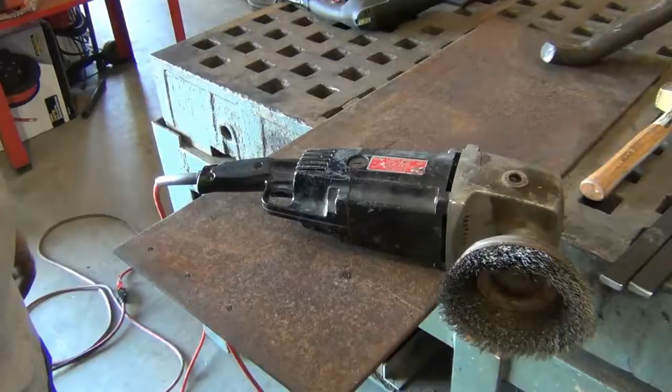Okay, I'm just going to clean the bottom of this plate. The plate is actually very rusty. We need to get that out of the way so that we can arc weld it. I have a MIG welder, a 125 amp unit, but it's just a little too light duty, even using a gas mixture, to weld anything this thick. So I'm going to go ahead and use the arc welding stick process here.

And I can't say it again too many times: buy quality tools. Sometimes if you know you're going to use a tool once or maybe twice, and then throw it away, that's fine. But if you're planning on keeping a tool for a long time, it pays to invest in it.

I bought this grinder when I was probably 17. This is a model 315 10580, a Sears 9-inch sander grinder. I'm now 60, so this has been around a long time, and it works just as good today as the day I bought it. The one thing I did have to do is replace the cord, because over the years it got pretty banged up, but the grinder itself still works just as good as the day I bought it. So do spend the money, buy good tools, and they'll last you your lifetime.

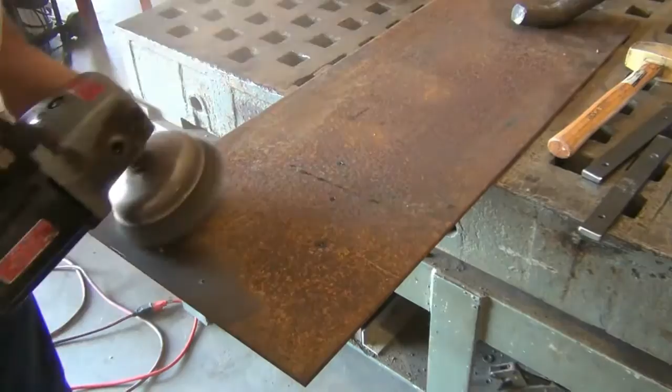Use a tool that's got the power to do the job. This is all the way down to nice clean bare steel, and there's absolutely nothing I need to do from here—that's ready to go. So I'll get the other pieces cleaned up on a stationary, bench-grinder-mounted wire wheel, and we'll get this bolted together, and I'll get the welder set.

Okay, I have the pieces all put in place and we're ready to weld, but there's such an array of welding rods and processes, and how do you know what to weld what with, because there's so many different things. This is a resource put out by the Lincoln Electric Company. It's widely available. This particular one is the 100th anniversary edition, published in 1995, but the process really doesn't change a lot. Sometimes there's a new rod or new material that comes out, but for just about everybody here doing generic work with like A36 plate, which is what this is, and just putting general stuff together, you're going to find everything you need to know in this book.

I think I paid $20 to $25 for it on eBay.

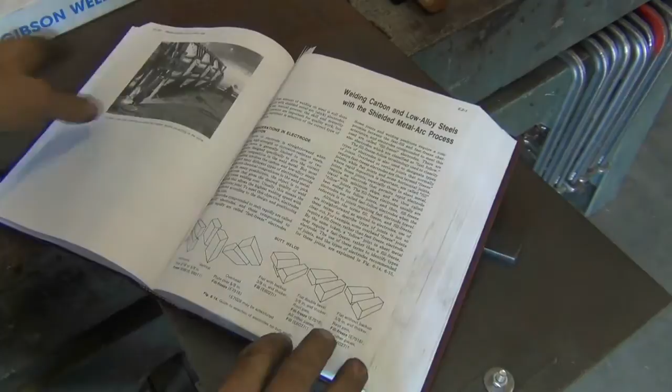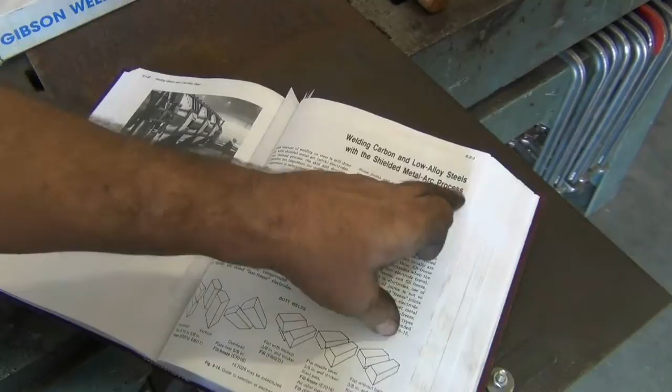So what do we do here? I'm going to come over here to section 6.2-1. This is welding carbon and low alloy steels with shielded metal arc process. Shielded metal arc, SMAW, shielded metal arc welding is stick welding with regular rods.

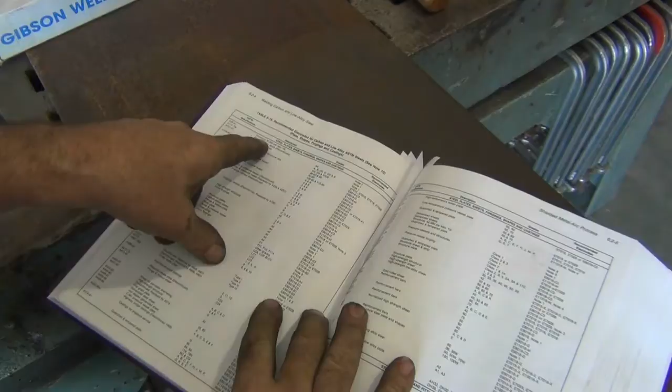So this is where we go to find that kind of information. Then I'm going to come back here to my last bookmark, this is 6.2-4. We're going to be welding A36 plate, so that's A36. That's my material right there. Structural steel, 36,000 psi minimum.

Pretty wide open here, it just says see note 1. So we'll flip the page over, and down here in note 1 it says, unless restricted by specifications, such as something that they would put on a drawing or whatever, use any E60XX or 70XX electrode for steel grades with 60,000 psi or less tensile strength. For steel grades with 60 to 70,000 psi tensile strength, use E70XX electrodes. So that means pretty much any 60 series electrode, and we will be fine.

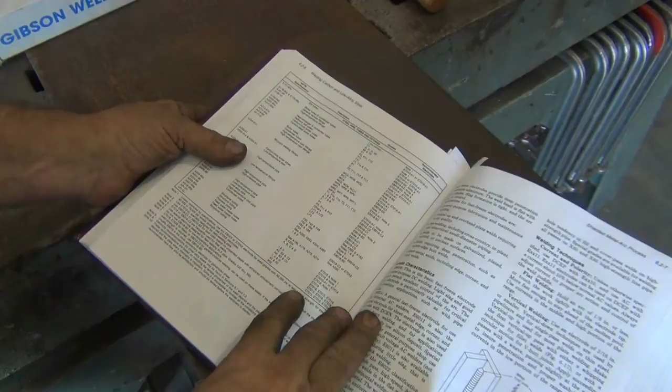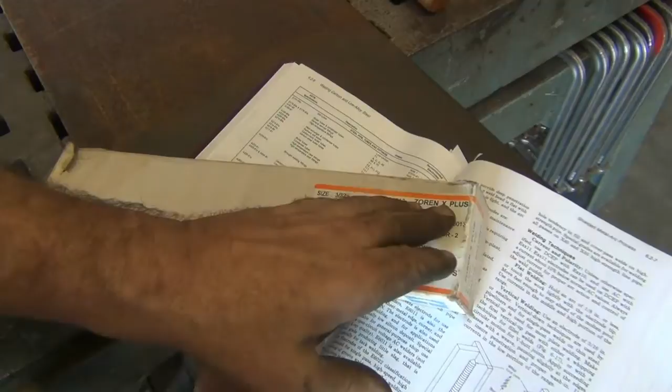So I've dug around on my shelf, and I came up with this. You don't need to know the name of who makes it, but it's made by Gibson Welding Products. It's E6013 rod, so this conforms to AWS SFA 5.1 E6013. This is the same as Lincoln E6013 or Miller E6013 or whatever you're going to get at Home Depot, E6013. 6013 is 6013. We're going to be using 3/32 rod.

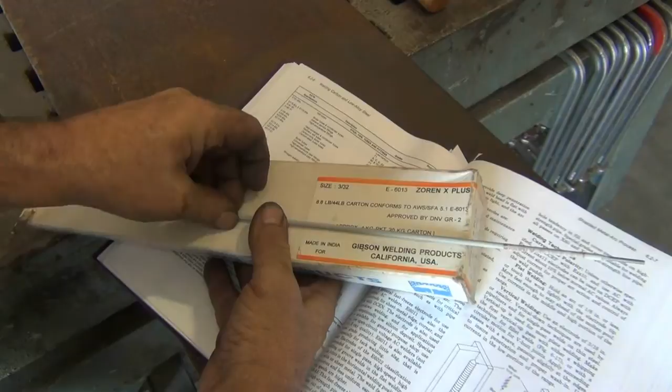That's pretty small because we don't need a lot of power, a lot of holding. I'm only welding 1/4 inch material, and I really want to try to keep warping down to a minimum, so we're going to use 3/32 E6013. So now we know we can use that.

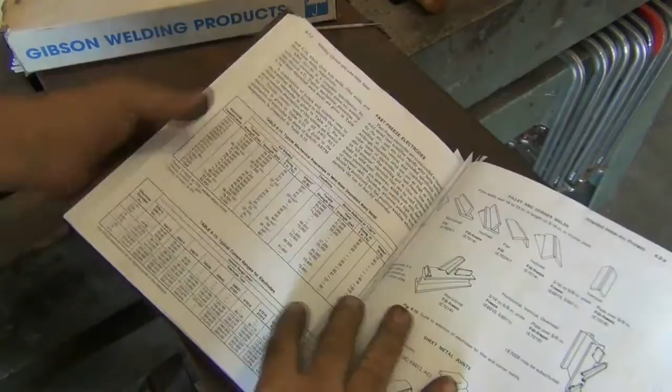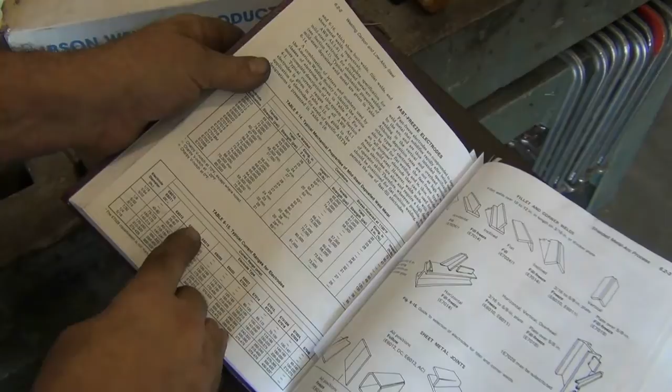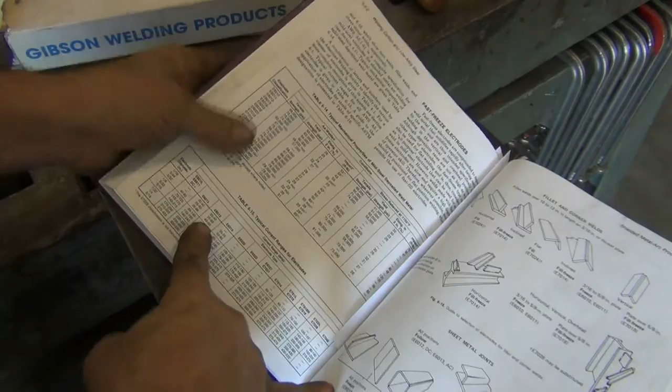I flip the book back over here, and I look at typical current ranges for electrodes. This is page 6.2-2. I go to 3/32, I go over here to E6013, and that means that we can use between 45 and 90 amps of power on our welder. And if we go over here to this other section here on 60, let's see if I can find it.

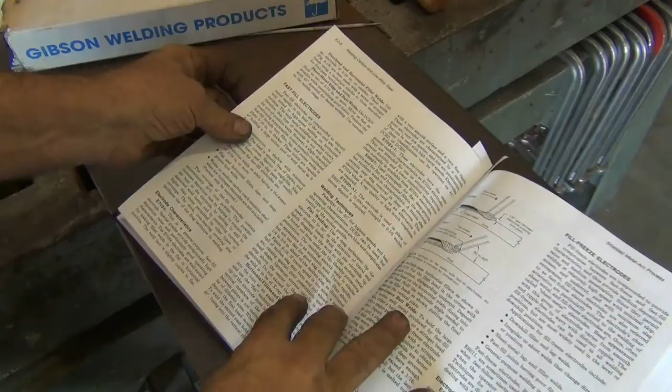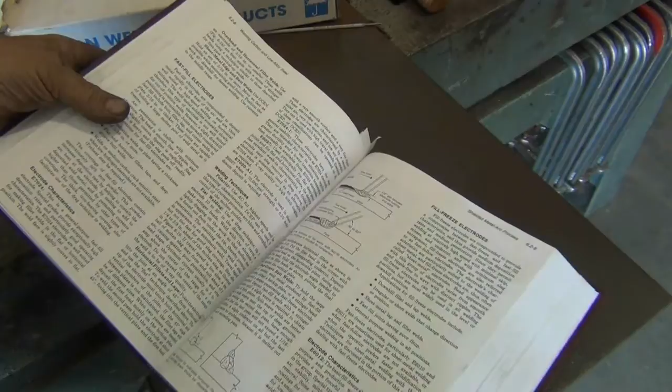Yeah, okay, 6.2-9 right here. Under fill freeze electrodes, we can look at E6011 and E6013 right here. This electrode is used in place of E6012 for sheet metal welding, so you can do really thin stuff with it, where appearance and ease of operation are more important than speed. AC operation is excellent, so we're going to use AC current, and we're going to use 45 to 90 amps. So that's how we know.

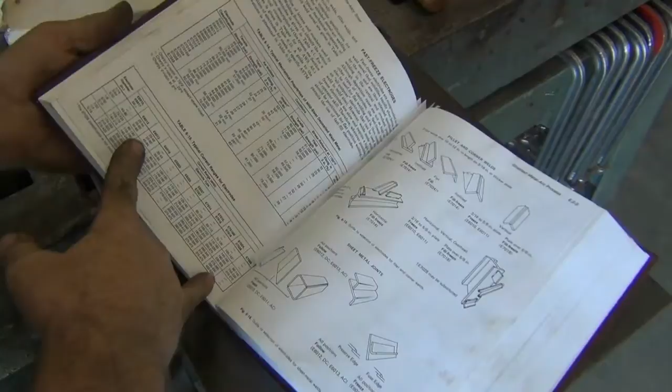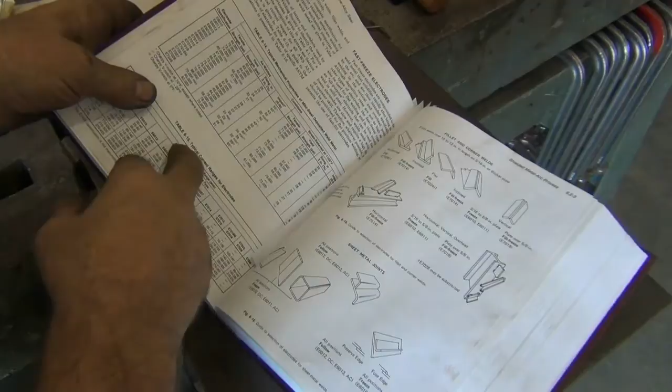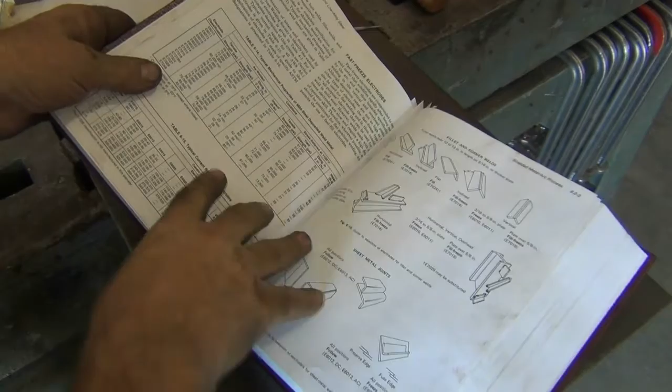We can look it up here. We know that we're going to be welding with an electrode that's going to be compatible. We know how much current we're going to use. We know AC or DC, and we're going to be using 45 to 90. I'm going to probably set it at the higher end of that because it's a little easier to get the arc started, and I am welding a little bit thicker. I'm not welding thin plate. So I'll take you over there and we'll set up the arc welder.

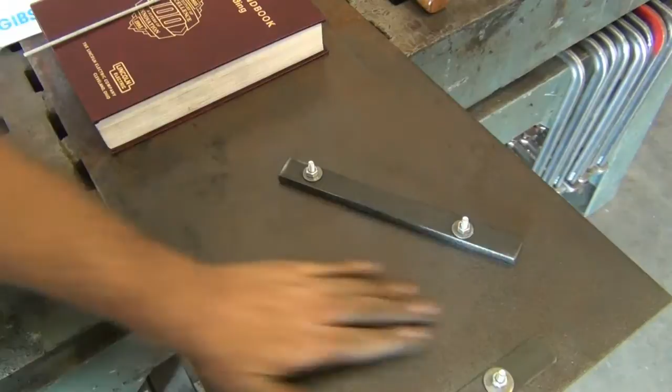But before I take you over there, seeing we're already looking here, this plate's clean. I've got my material clean. You really can't weld through garbage. Got to take all the paint off, got to take all the rust off. It's got to be clean, minimum 1 inch from the weld zone out.

So I could have just gone 1 inch out all the way around this and that'd been okay, but I had the wire wheel out. It was just as easy to go ahead, clean up the whole plate, get it ready to go. This is 1 inch, so you need this much room all the way around wherever you're going to weld, because what happens is that garbage on the plate, whether it's paint or rust or whatever, will get sucked into the weld and contaminate it. So we want nice clean welds, and we have to make sure we clean all the way around, both pieces clean all the way around.

And that could include going around the edge, like down here. It can actually suck off of this corner here. Material or dirt could actually get sucked up and around, so that has to be cleaned.

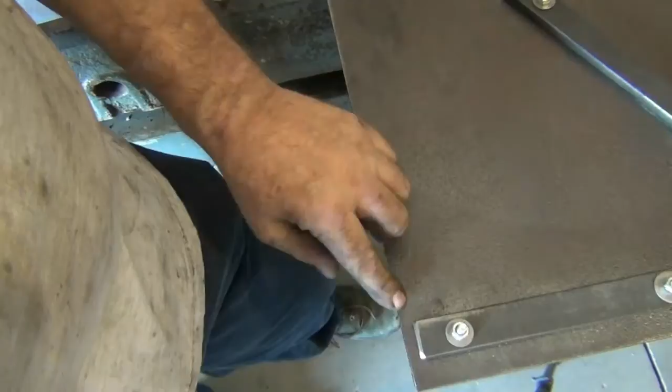So we're going to do AC welding, which is right here, AC welding, so I make sure this control is set to in the middle. We're going to do 45 to 90 amps, so that's white, so the white, well, the minimum here is 190, can't use that.

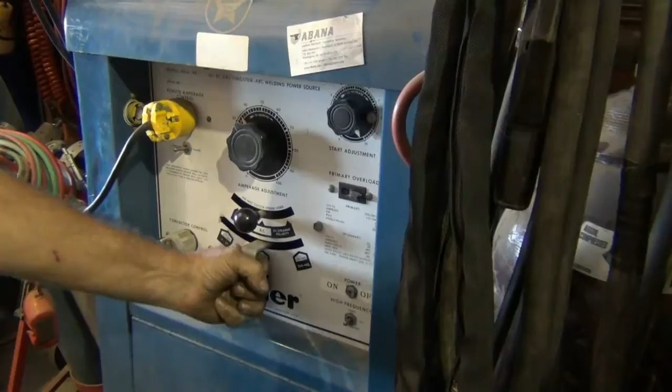This one is 5 to 48 amps, that's not the right one, so we'll come over here. This one is 20 to 230 amps, so that's where we want this. This is set in the middle. If I needed less, I could come over here like that, but that's where we need to go. So I move it back into the middle. It's not real accurate on how to set it up. Welding is more of a touch kind of a thing. So minimum is 20, maximum is 230.

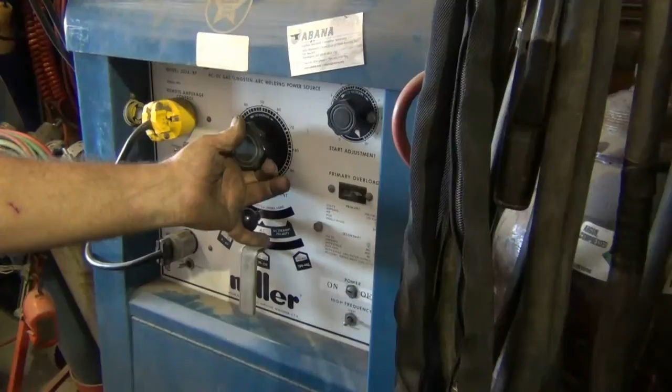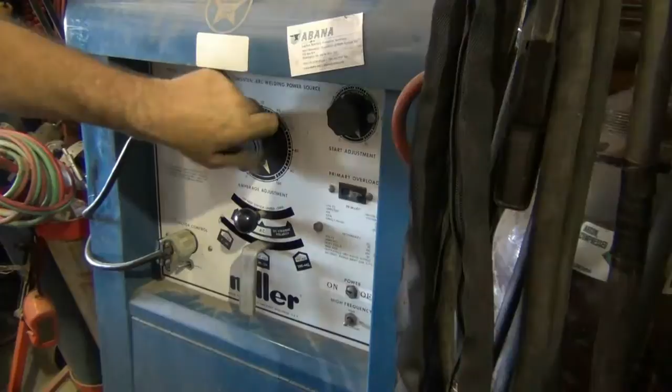We're going to run 90, so we're looking at maybe 35% power. So we'll dial this down to the 35% range. Down here at 0 would be approximately 20 amps, and if I turned it all the way over to here, which is 100, that would be 230 amps. So down here at 0 would be 20, so we're going to go about 35, put it in the middle.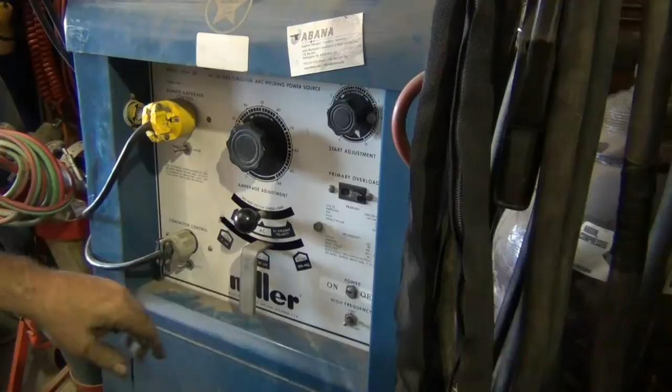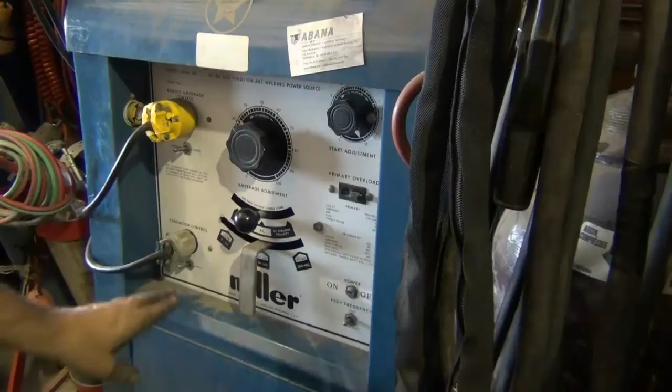On this particular welder, we've got high frequency off because we're not going to need it. We are on local control so that these controls work, and we're on local for the contactor. So this machine's ready to go. We're going to turn it on, and I will move all my cables over to the table.

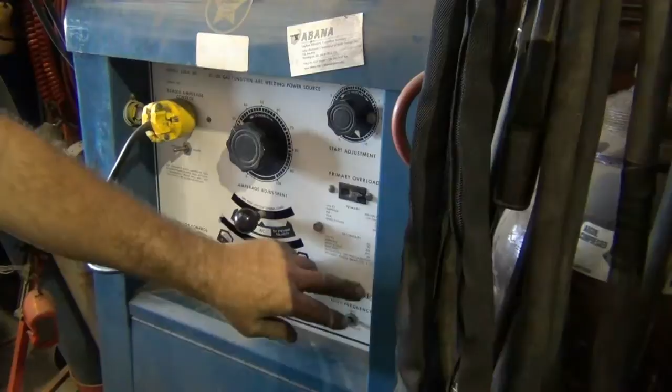Okay, so we're getting our stuff here ready to go. These are just leather sleeves. You can get these at Harbor Freight for a couple of bucks. They're really nice for protecting against splatter, although the elastic leaves a lot to be desired.

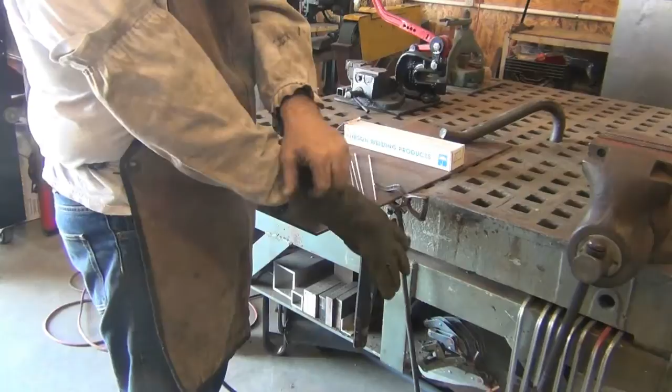Regular arc welding gloves, go ahead and pull those on. I'm wearing a nice helmet, this is an auto darkening helmet. I do find that the Harbor Freight ones for 60 bucks work pretty well. I haven't had any burn in my eyes, and I'm pretty happy with it.

So I've already pulled out some rods, laid them on the table here so that I can get my hands on them.

I am not a professional welder. I do not play one on YouTube.

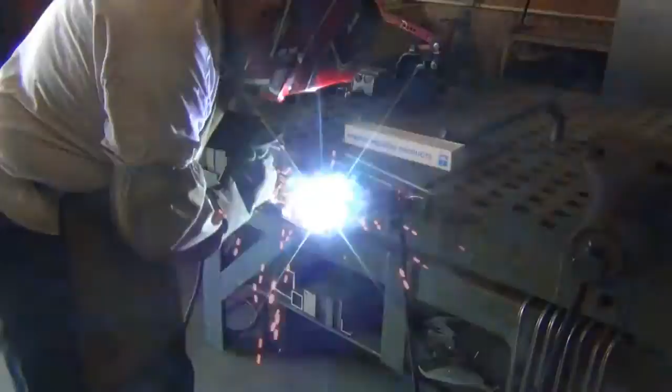Alright, so those are not going anywhere. I do want to make sure that they're pulled down tight, so I'm just going to put a couple, maybe one on this side here and one down on this side here. I don't want it shifting, I don't want that possibility.

Clean the end of the rod. I did pull my cable up so that I get the slack so that the weight isn't pulling. You've got to be able to be comfortable when you're doing this stuff.

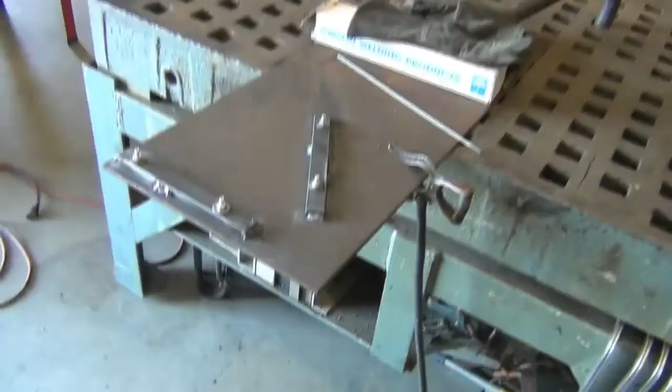Alright, so what does that look like? Some of them are a lot better than others. Let me pull you in here. And that'll do what we need to do too. So typically, you know, they're not perfect, but they're going to work. So let's go ahead and get things cleaned up and ready for the next operation.

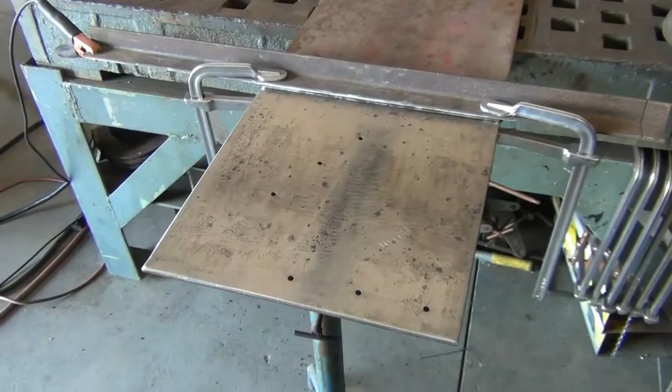Okay, so we're set up here ready to cut the material. The black line, because white doesn't show up very much on polished metal, but the black really does. We're going to do this with plasma.

So this is the Hypertherm Powermax45. It's one of their more popular units. It does everything pretty darn well that we would need to do in a shop this size. It's got several nice advanced features.

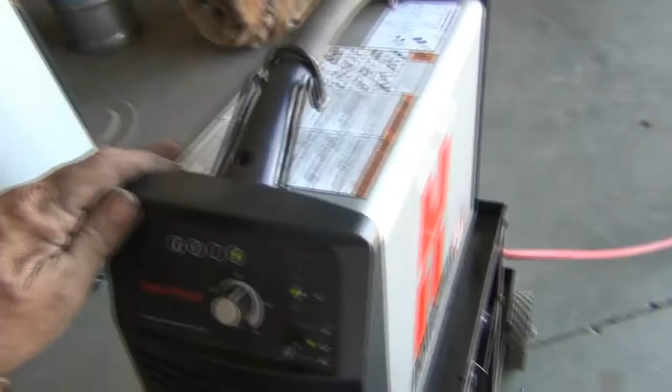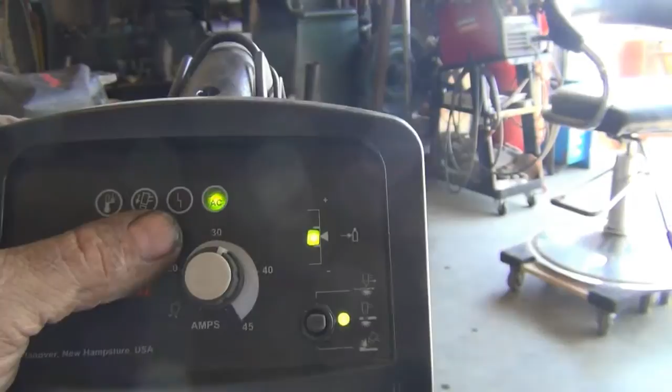The control panel is set up to tell us that the power is on, and we do not have any faults with the torch or with the air or anything else.

This is our cutting control, this is current. The more, if I turn it down below 20, then it automatically turns the air on, but we're going to wind up using about 35 amps.

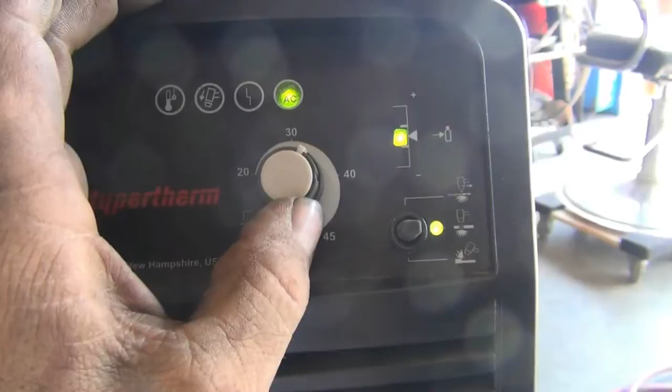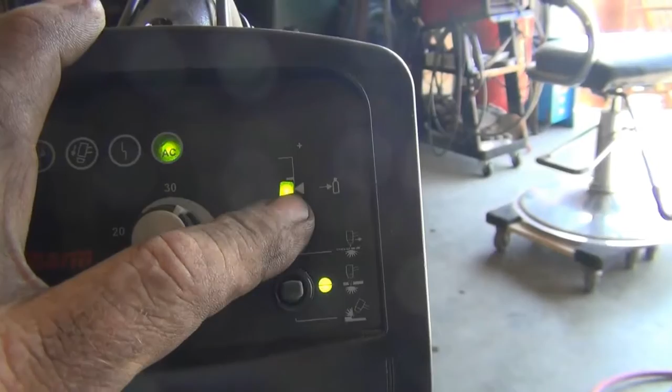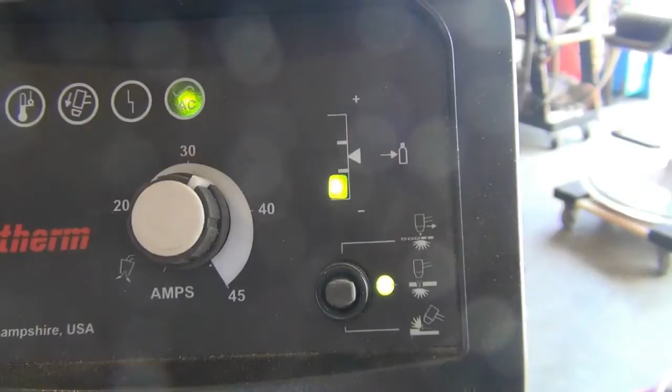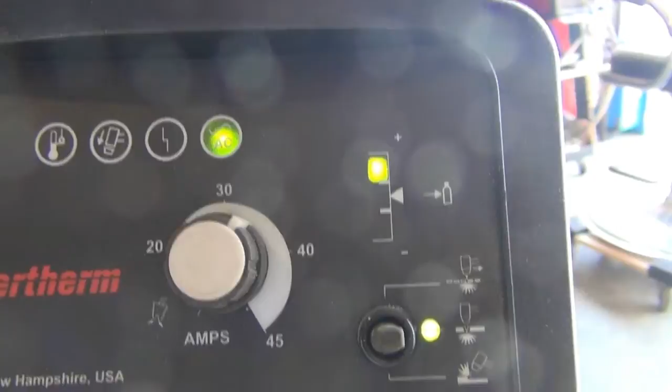Over here is the air pressure, that tells us we're in the middle, tells us we've got correct air pressure. The air adjustment is right back here, so I can turn this and go one way, and then we're too low air pressure, go back up the other way, that's marginal, and oh, we're good, and oh no, there's too much, don't do that, there's too much air pressure. So we'll just back this down, and there we go, we're ready to go.

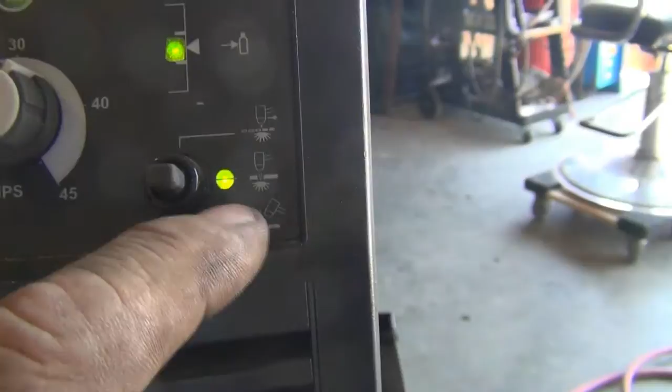Middle is normal cutting. On the bottom is for gouging, if you're going to cut out a weld or something. And then on the top it runs for interrupted cut. That's like if you're doing expanded metal and you don't want to have to start the arc each time you go through a little section.

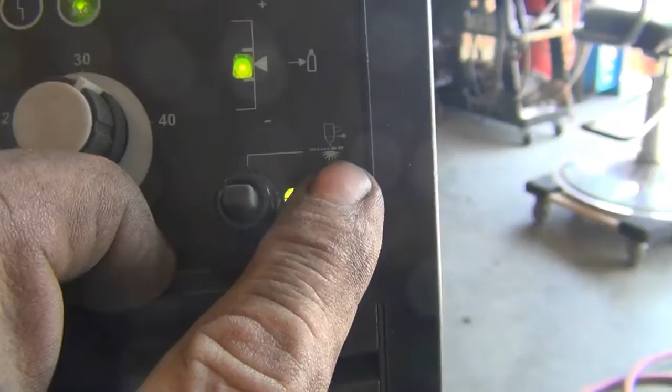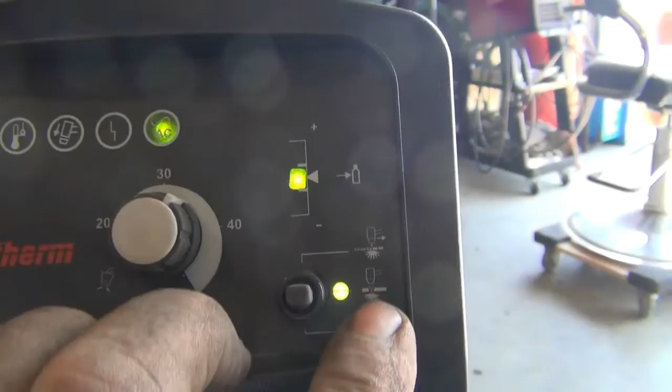And then as you change your cutting process, your air requirements change. So for gouging, way too much air pressure, but normal we're okay, and in intermittent we're still okay. So we're going to use this.

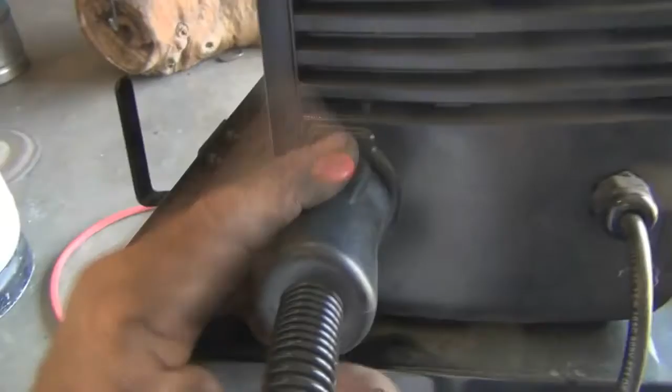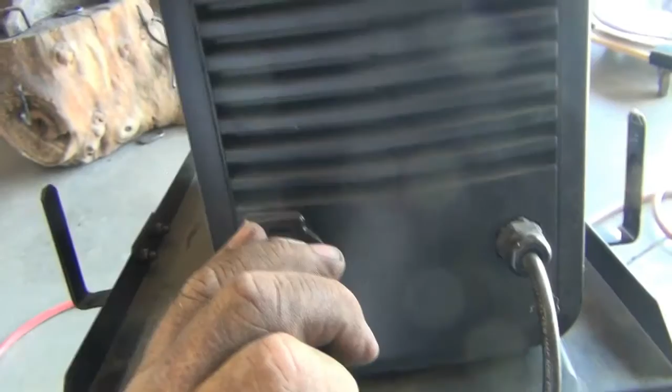This is a replaceable or interchangeable cutting torch. This could come off. You could use this same machine on an automatic CNC.

So we're saying that we're just a little low. I'm going to bounce the air pressure back up a hair, and we're solid to go.

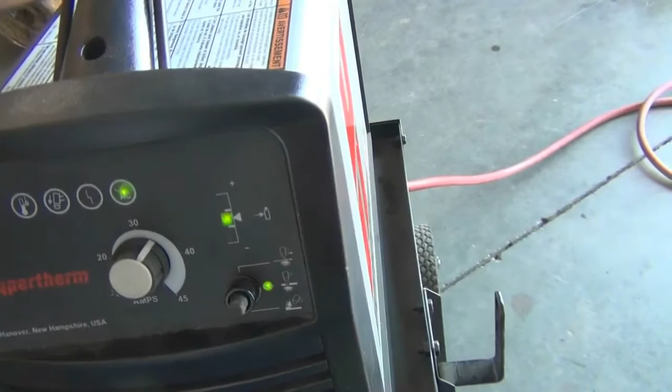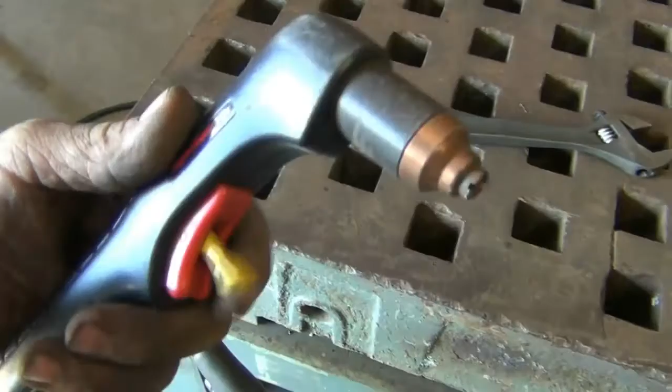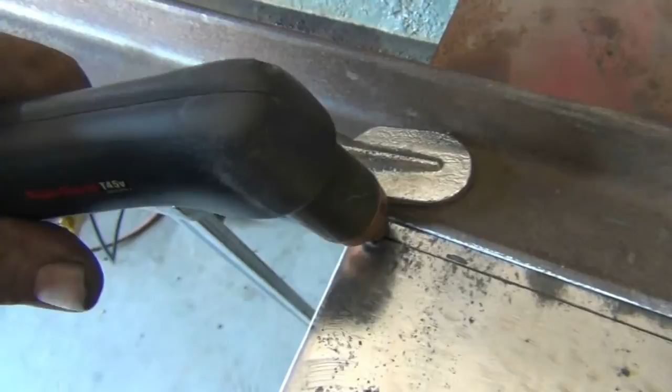Okay, and all we have here is their torch. You lift the safety, pull the trigger, then you got fire. So we're going to take this, I've got it lined up so that the center of the cut is going to go

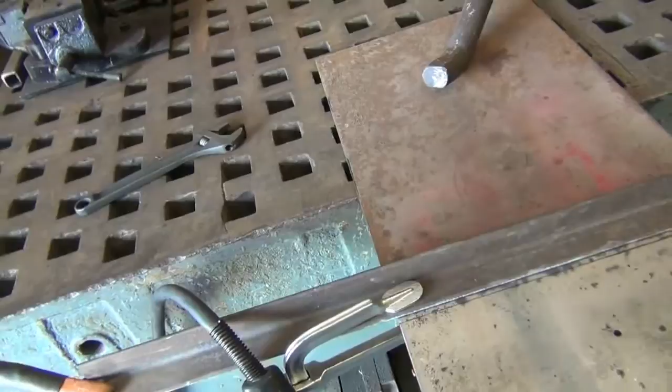right down the material. Air compressor will kick on. I'm going to be using air. So let me put you on the tripod and we'll get this cut. Now that the air compressor is shut off, I can talk again. One more thing, I did put a stand underneath just so that the cutoff is going to be supported.

A little bit of work with the chipping hammer, and we will have a clean edge, and then that needs to be radiused with the grinder.

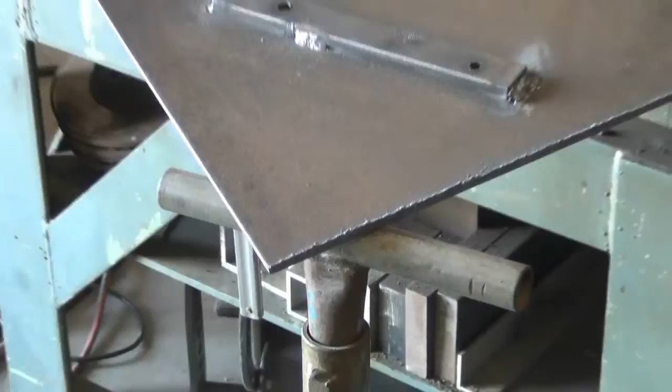Always soften your edges. That's just a mark of a craftsman. Leaving rough edges, sharp corners, that's just a mark of a butcher. So always take time, clean your edges, keep everything straight and clean.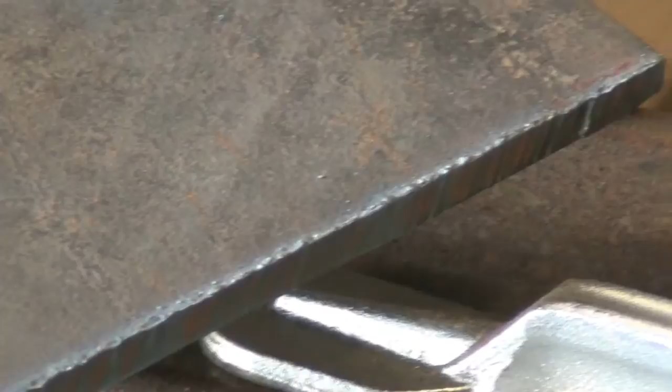I'm going to take a moment here and chip this. Clean that up with a grinder, and we'll move on.

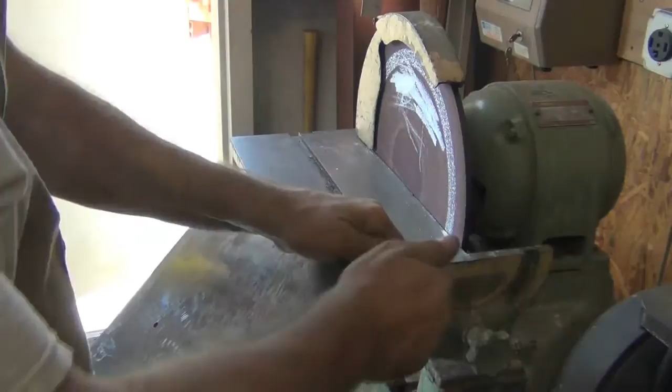Okay, now that I have these radiuses cleaned up, these corners, edges softened, I still have some sharp corners. I'm just going to clean those up here on the disc sander.

I've been using the sander to polish and sharpen my soapstone, so that's why it looks like that. It doesn't hurt anything.

Put this face down. And just radius these corners.

Alright, we'll just soften these sharp edges here. And now we've got nice radiused edges. Everything's nice and clean. That's the mark of somebody that cares about their work, a craftsman, a tool maker.

And here we go. The edges are all nice and smooth, done with a flap wheel. The whole piece is burr free, no sharp edges anywhere.

And we're ready to go to the drill press and open these holes up to the tap size. I'll move over there and set everything up there.

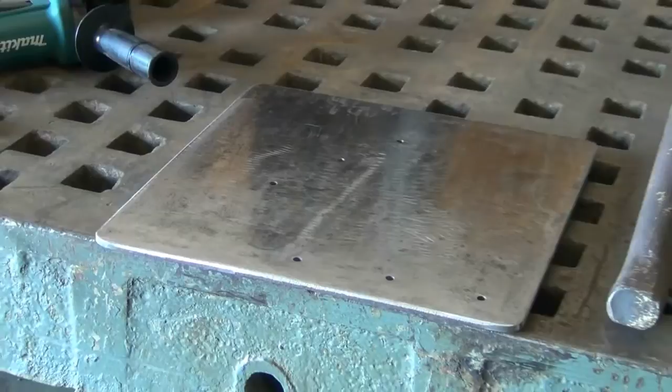If you don't have a disc sander like I've got there, then that's fine. You could just as easily do the same procedure with a side grinder, 4-inch grinder, 9-inch grinder, whatever you have. But it's easier if you have the disc sander, but it's not mandatory to doing good work.

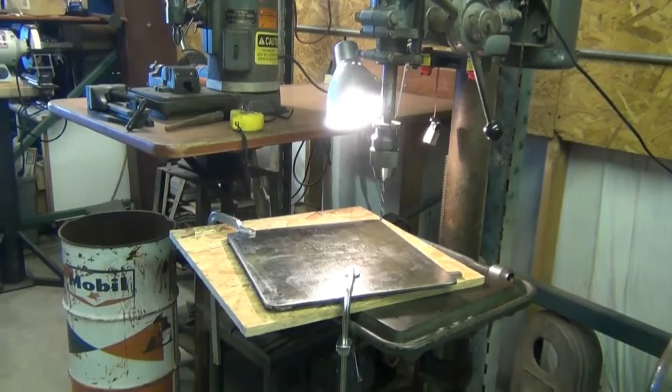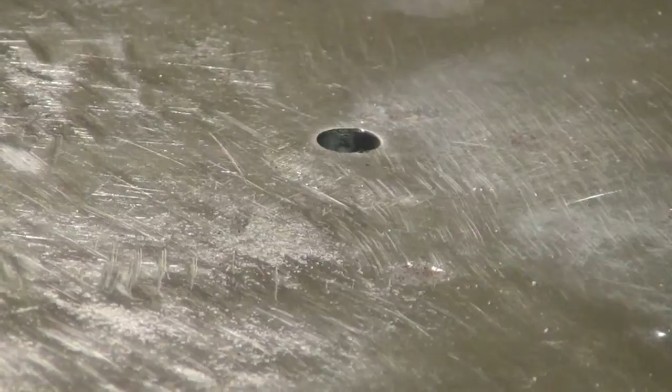Okay, next we move over here to the drill press, and we just take the 1/4-inch drill that we used on the top, put it straight down the hole. That way we know we're lined up.

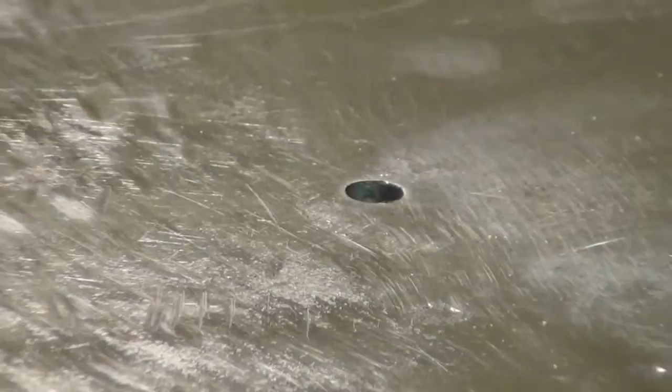So I'm indicated cleanly into the hole. I'm using a piece of wood underneath the material. That way we know when we're through and we're not going to drill into the table like some kind of yahoo. And from here on out, all I need to do is drill different size holes until we get to the finished cleared tap drill, and we will do all the holes like that.

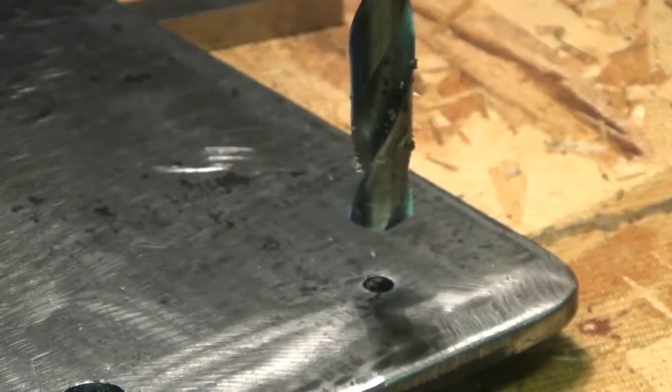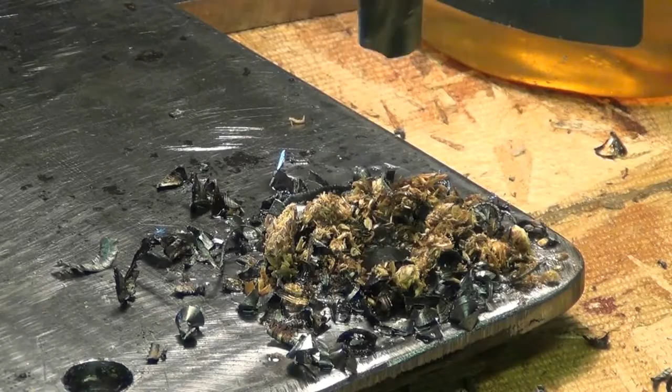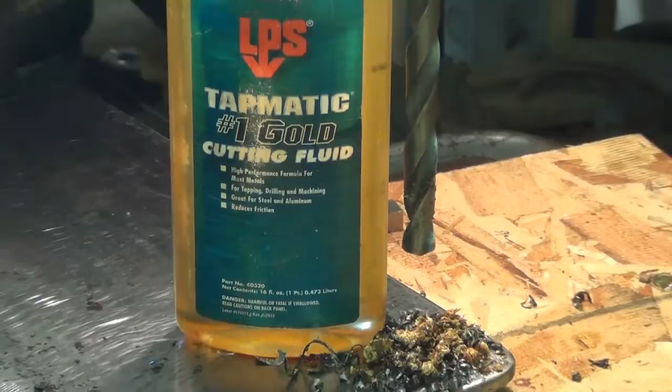Okay, that's the last hole. Just in case you hadn't been seeing it, this is LPS cutting fluid. It's really pretty good stuff. I really like it. It works really well, not just for tapping, but for drilling holes and any machining operation. It works on all metals, so it's really a nice thing to have.

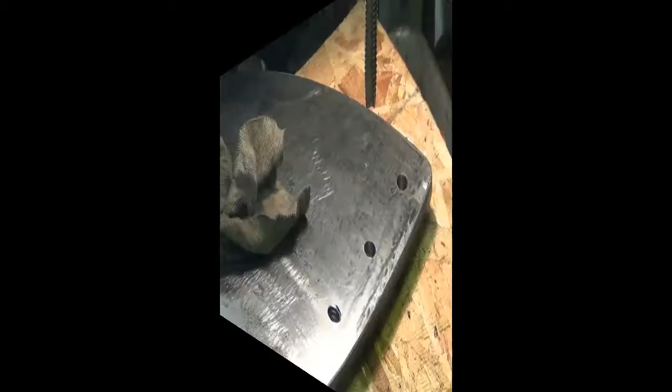Okay, I ran into a little problem. I don't have a tap handle big enough to fit this tap, so I'm going to start it with power, then I'll take it off, put it in a vise, and we will use a crescent wrench to finish that. So what I'm going to do is turn the power on and then turn it off just before the threads engage.

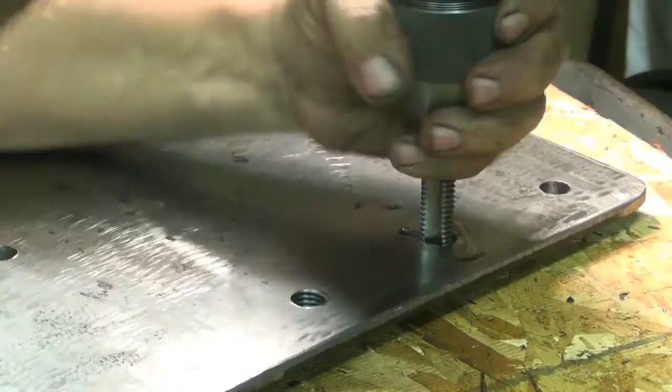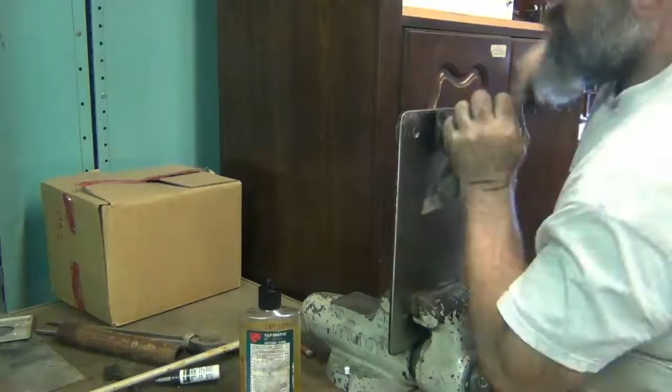That gets me started straight. I'm going to put opposite torque with my hand so that I'm not twisting the actual tap in the hole. Alright, just do that with all the rest.